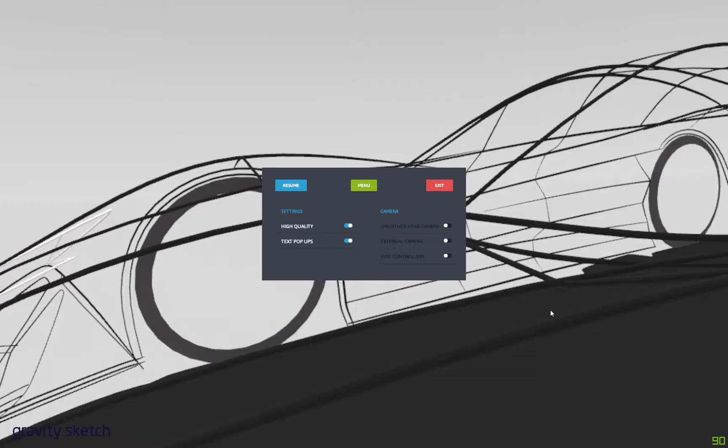Alright, so this is part 4. I'm going to start doing some surfacing on this car.

So one trick I like is if you hit escape while the software is open, this menu box will pop up. If you hit smooth head camera, that makes it a lot better for recording video. So I thought that was a good tip that you guys might like. So I'm going to resume and we will get back into the car.

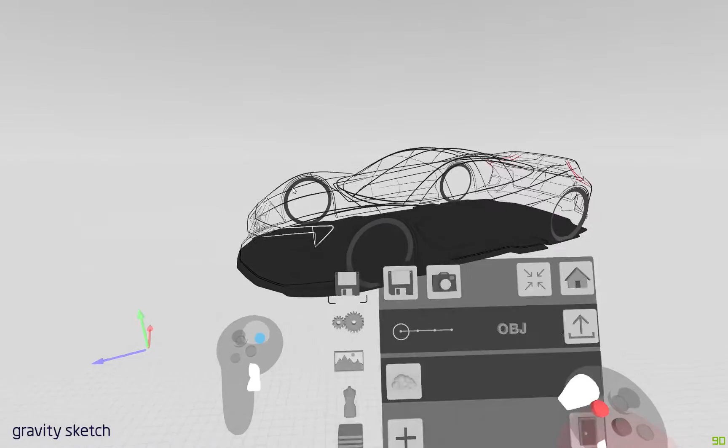I'm just going to go through some of my settings and turn some of this stuff back on. Leave all that where it is. A couple things I did get into doing.

I'm just going to actually hide this layer. I just cleaned up this front grille a little bit. I went more with the BMW kind of kidneys. Not really BMW, well I guess it is, it's a split grille there. So we're just going to keep that.

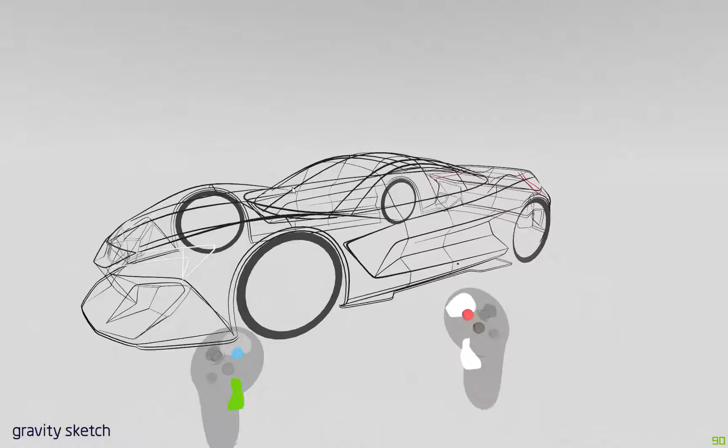I also added these splitter lines there. Those are just plain air sketch lines put right on the bottom of the rocker, and I adjusted the height of this front lower bumper here as well.

And the rear, I think I didn't touch anything in the rear. I just turned these taillight lines. I think that's going to be a taillight red, just to distinguish them for now, as well as that shadow layer there.

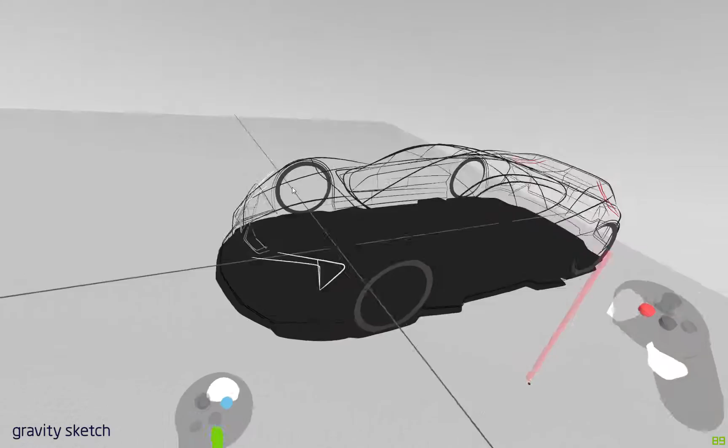I just drew the outline using the filled surface tool, drew that in top view and made the shadow line. That helps establish the ground plane, especially if I upload this to Sketchfab. There's no real ground shadow in that web app, so this shadow plane helps define the car in plan view and helps ground the vehicle as well.

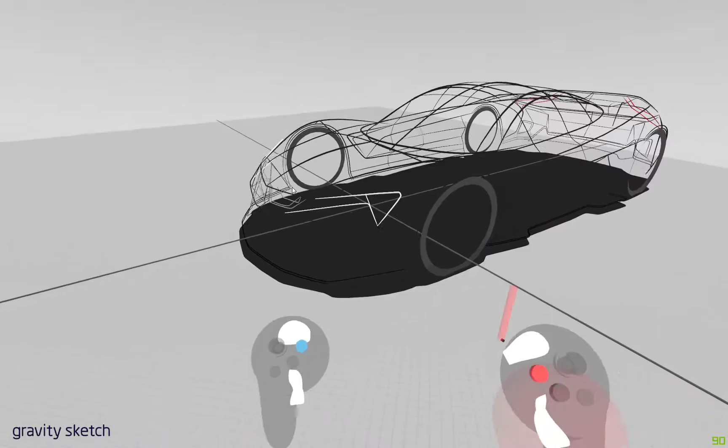So for now, I'm just going to hide that layer and create one called surfaces. You'll notice I actually did delete the layer with the suspension pieces. I don't think I'm going to get them to be visible, so I think that's okay for this right now. I think I'll just stick to surfacing this and showing you guys some of those tools.

So I'm just going to lock some of these layers. Actually, I'll unlock the sketch lines because as I'm building surfaces I start to adjust some of these curves and stuff to make sure they hit. Like this one's probably going to be a little low depending where that surface is.

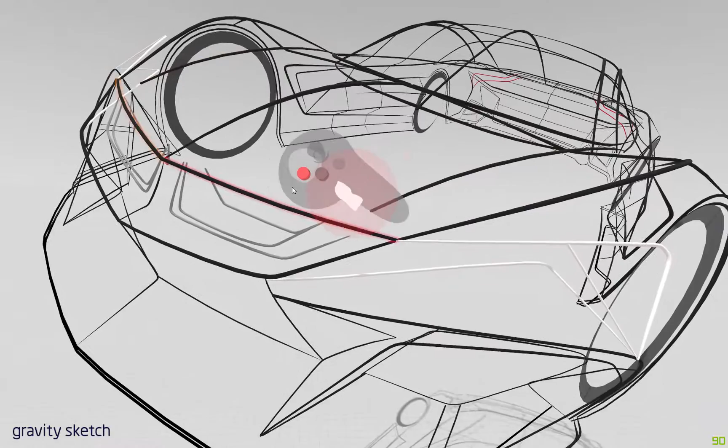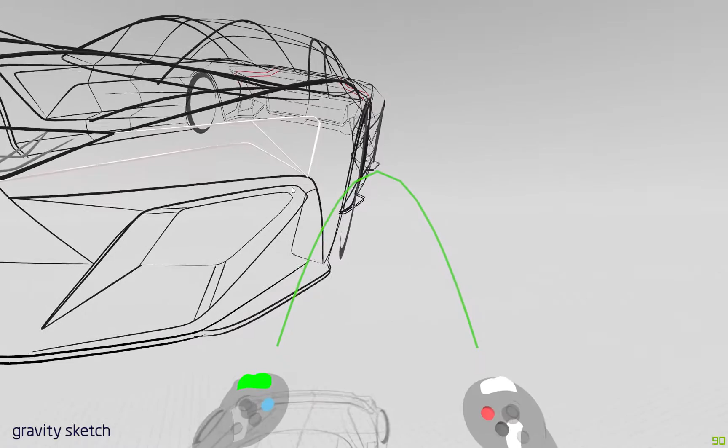So I just go to the curve surface tool and turn precision on, and I use point mode. This kind of surface has initial tension, so if you put it all the way up when you make your surface, let's make this green, you can see it starts out at its highest tension point, or it's the most curvature.

If you lower it down, I try and do it somewhere in there. When it starts out it's a little less, but depending on the angle of your hands, you can make that tension more or less. I typically like to do it somewhere in here because I'm doing relatively flatter surfaces. It might help if you start to go negative for somewhere through here or back there.

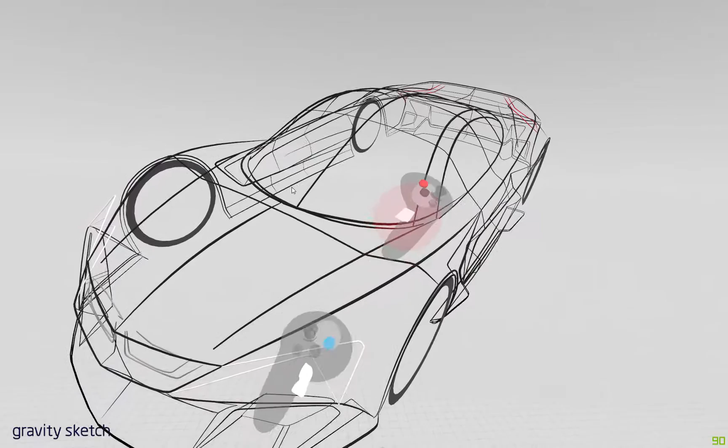Also, one other thing I saw in one of my comments is trying to get the smart move to work. I always thought that your hands needed to be, if you see the two ends of the controllers like that, to get it to work. It's a little finicky, I think there's a distance they need to be. I've always found that my hands are probably about there, but you can see that they're kind of in line with each other.

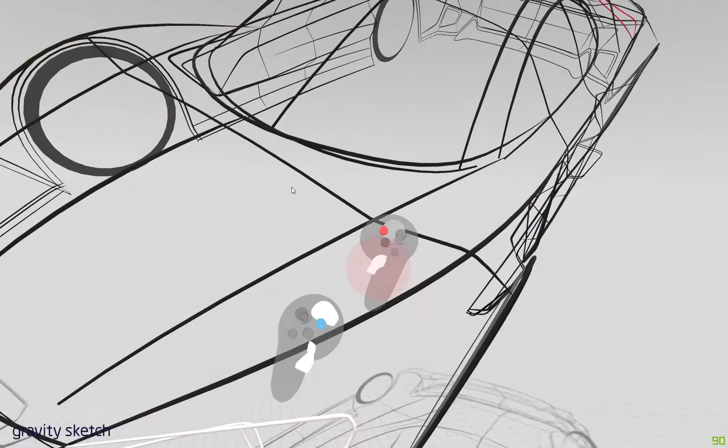They need to be close to an object; they won't do it while you're not near an object. So as I hover over an object, it pops up, and then it'll choose. Then I like to use my right hand there to kind of pick the axis it'll go on, and you can see that pops up. When you do it vertically, hovering over an object, you can start to move it in all those directions. It's nice to flip the view to keep your hands in a more natural position. I thought that was a good tip to show how that works, so just be careful when you're near other objects.

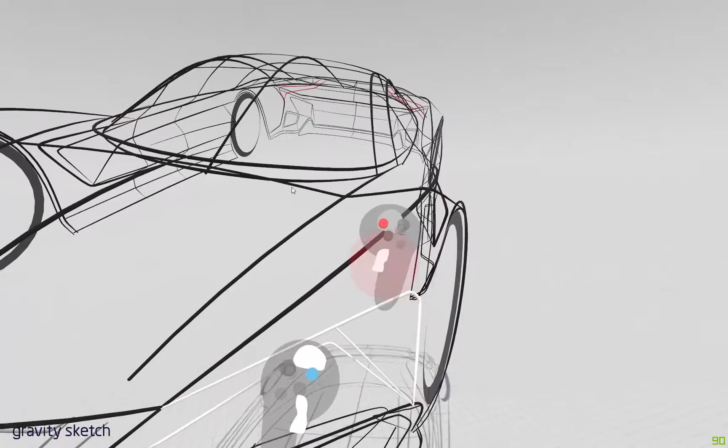You'll see that gray line is kind of an arbitrary angle, that you just want to make sure when you're near other objects, you don't grip and move those things.

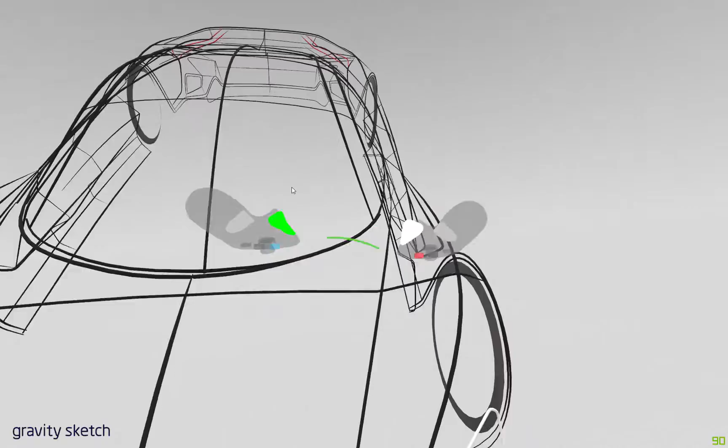All right, so let's get started with some surfaces here. I think I'm going to start on the hood. I'll probably just go and make this patch here and make another one through here, because that goes pretty far back. I'm not sure if I want to add a lot of points, but we'll just get into it and see how this turns out.

All right, and then I just grip the left trigger, pull the trigger, or right trigger to pull the points, and just go down using those curves as guides. And one more there. And then I go back and edit the surface.

You'll see that these points snap. When you have mirror plane on, they snap right to the center there. And then you can see how I notice that that point is a little low. I'm just going to pull it up.

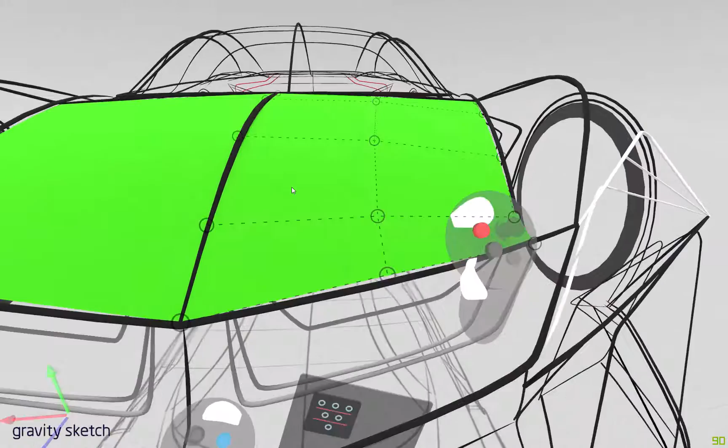Again, with all this stuff, depending how accurate you want to be, you're going to spend more time on this. I think this should be good. I'm just going to follow the trajectory of this curve here, and I'll add another surface on the right there.

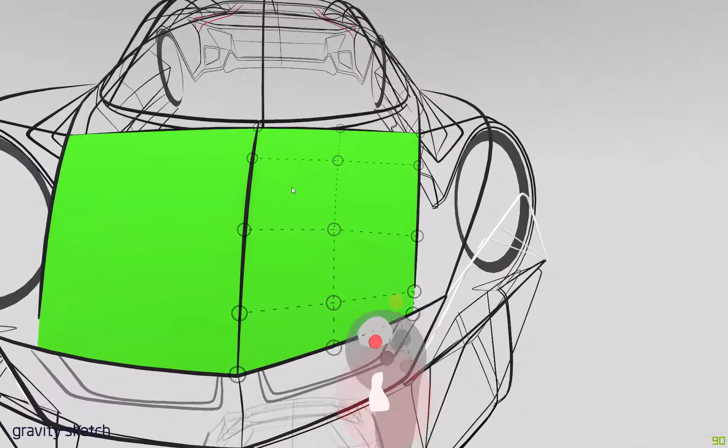And I think I can get away with these bigger patches with less points. As you get into more complex stuff, you're going to want to add more rows so you can push down on the right joystick there.

Kind of like if you're playing a video game, you're pushing down on, like, what is it, R3 or whatever on PlayStation. That'll add it there, and then you pull the trigger to add the point, and then you can move them. But I'm just going to undo that.

And then if you want to add them in this direction across there, you can hover, do a right grip, and trigger, and you can see it added at that point there. So if you needed a little more control over the curvature in that direction...

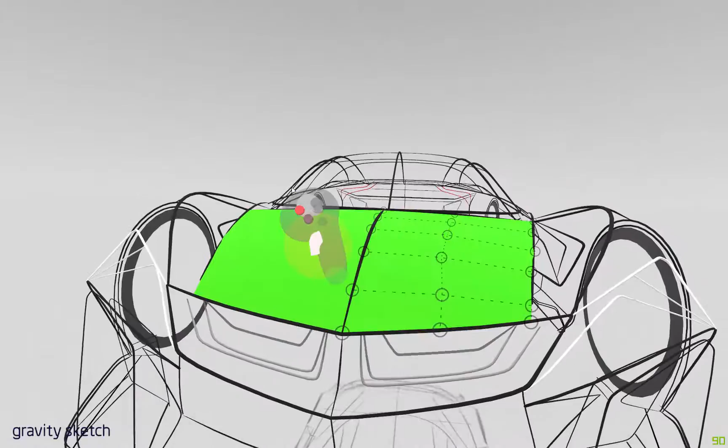You could do that, which I think I might just keep that where it is. And I'm not too worried about the tangency across here. It doesn't look too bad.

This is just to kind of fill in the volume of the surfaces there and give it some kind of color. On this one, I'm just going to come here.

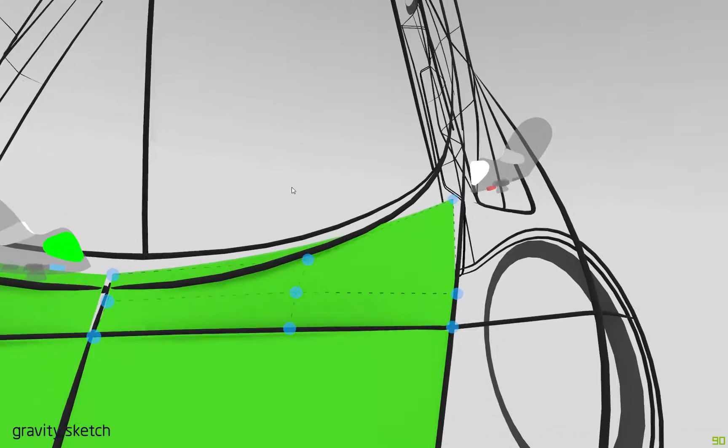And then I'll drag that as far back as I can. You'll notice I accidentally added another row back there, but that's okay.

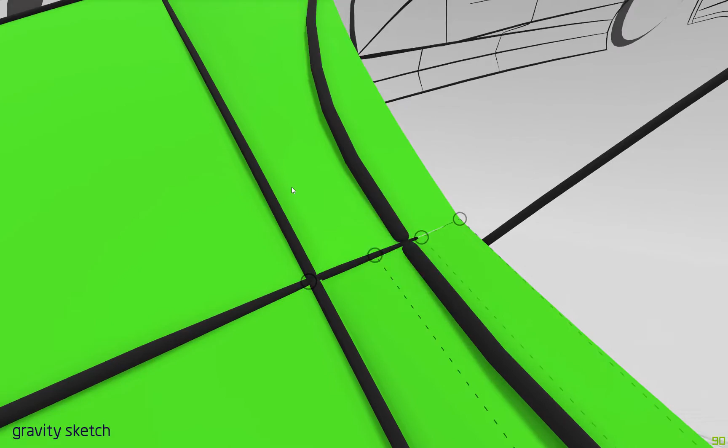So I'm just going to move these to the center, move these forward a little bit more, and then move these up.

If you pay attention to how many kind of rows of CVs you put, you can use that to snap to these ones. I don't typically do that because each patch of surface is going to be different, as you're going to see here in a second.

Oops, I'm going to add one more in here just so I can get a little better curvature around this. So we're just going to start editing these points a little bit more.

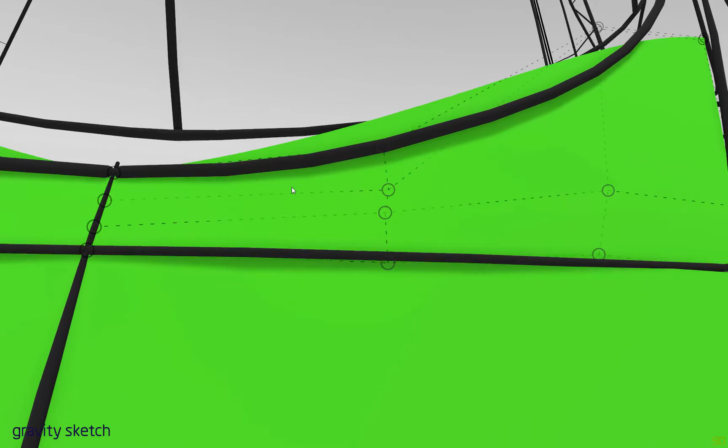And then I try and hide the surfaces, as I explained in my other videos, behind these sketch lines, just to kind of help this out a little.

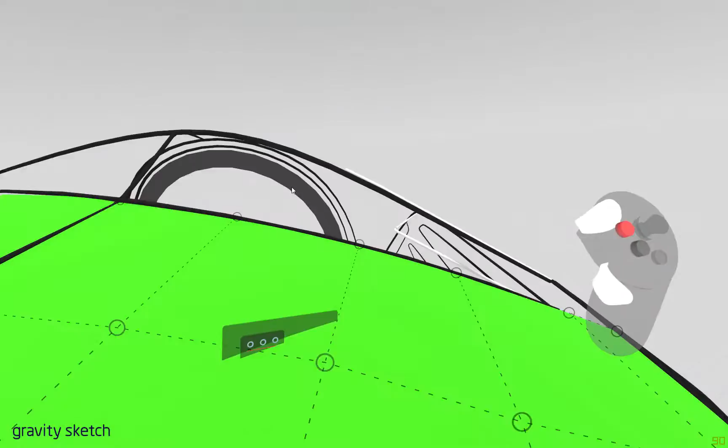Oops. And this is when you start to notice, if you kind of look down across things or from other angles, you'll see them popping through, or I see that this surface is a little shallow. So it's always good to work with things from a different perspective.

There, and I think this one, we're just going to come across like that. That should be good enough.

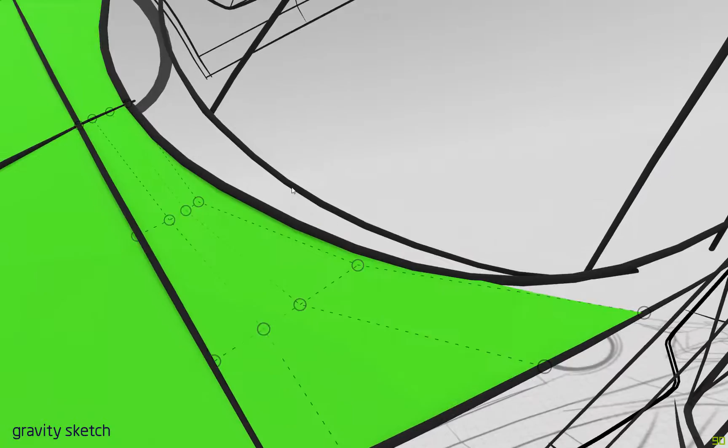Let's see how far I can get that. You'll see as you start to pull it more, the curvature will change, but we could probably get away with something like that there.

And then I'll just do a kind of rougher surface through here to fill in this kind of triangle that comes back here.

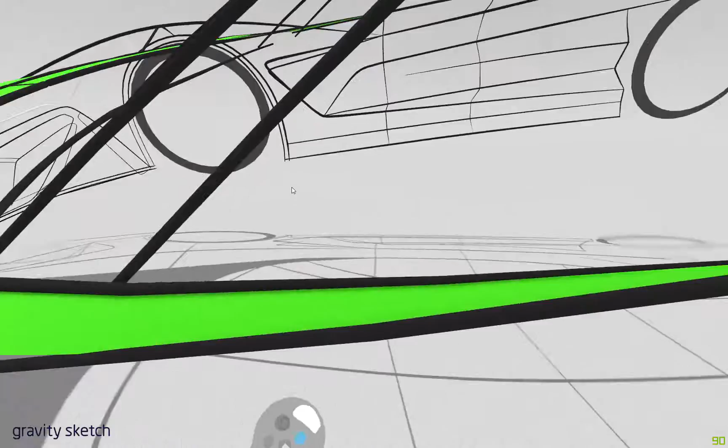And that's it there. Then I'll just move that. Looks pretty good. Excuse me.

And that looks good. Okay, I think that should work for that.

Just going to edit this a little bit more there. So the surfaces go pretty quickly.

You just got to get in the groove of pulling them out and working at a scale that you can manage in kind of one stroke.

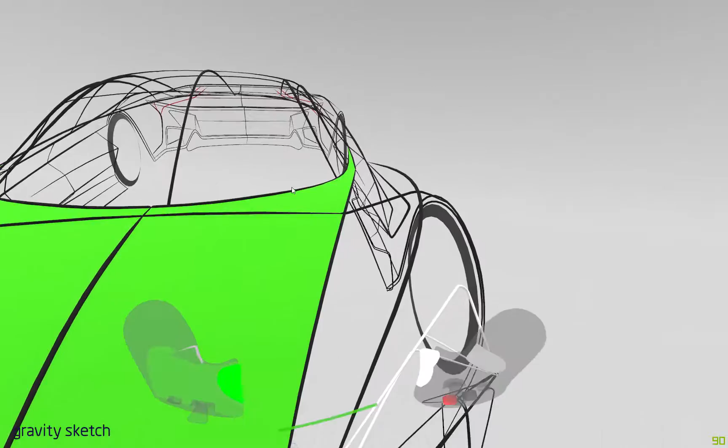I actually tend to sit down while I'm doing a lot of this stuff, so I just work from my chair. So I work pretty small. You can see how close my hands are together.

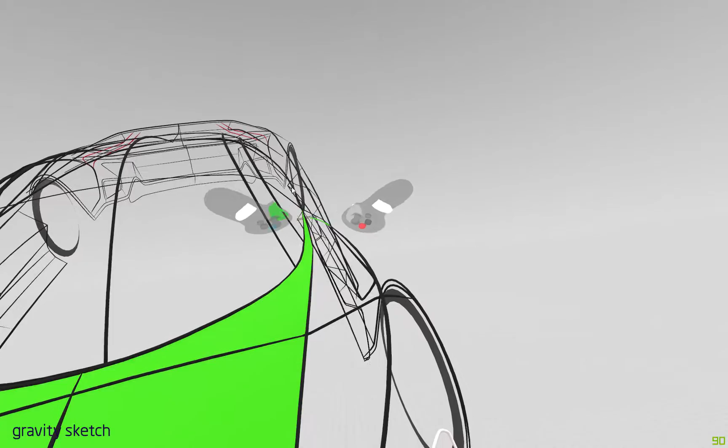They're only maybe 5 or 6 feet apart, and that's my maximum reach there. So maybe a couple feet for each of my arms, and then you can either work toward yourself or away from yourself, depending on where I start.

That's how I work. I'll probably try and work all the way to that point from here. If you don't do it in one stroke, I like to grip with my left hand, and that way I can move the scene away or towards me. Then I just pull out more points to fill in these surface boundaries defined by some of my sketch lines.

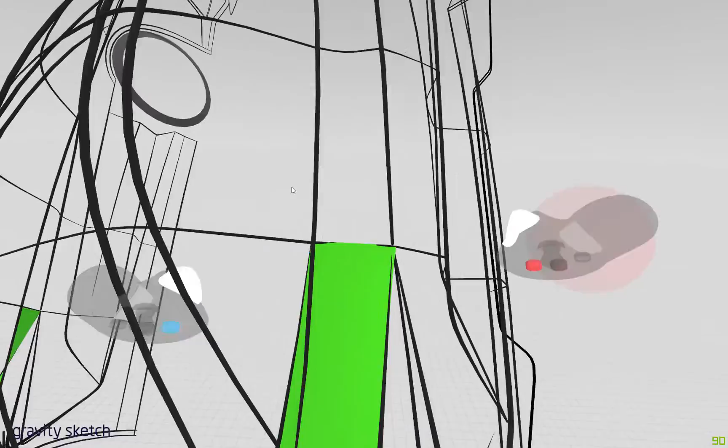I think that'll be a good spot to end that. You can just end it by letting go of the left trigger. If you pull one more time, you'll add another row of CVs, or control points, at the end there. So that's that — this is another way of getting a different view on it. That worked pretty well.

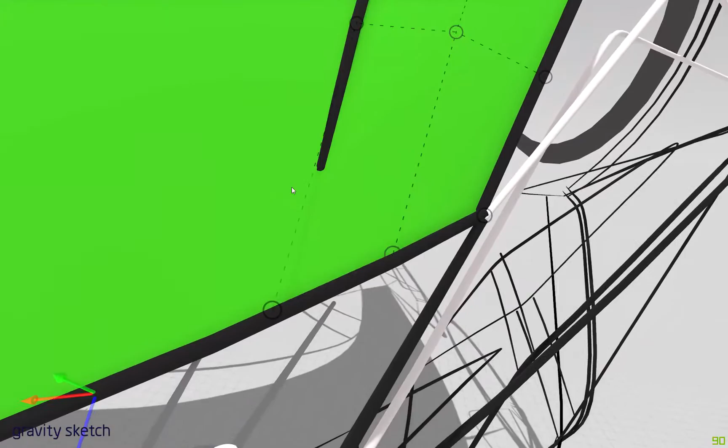Let's move these points. I kind of want that to fade out there, so I'm going to indicate that with that sketch line. And surfacing later, I can fill that in. You can see up here, this didn't quite get there. So it looks pretty good.

We'll change up this end a little, and we'll put that there, and that, like that. Cool, so that's that.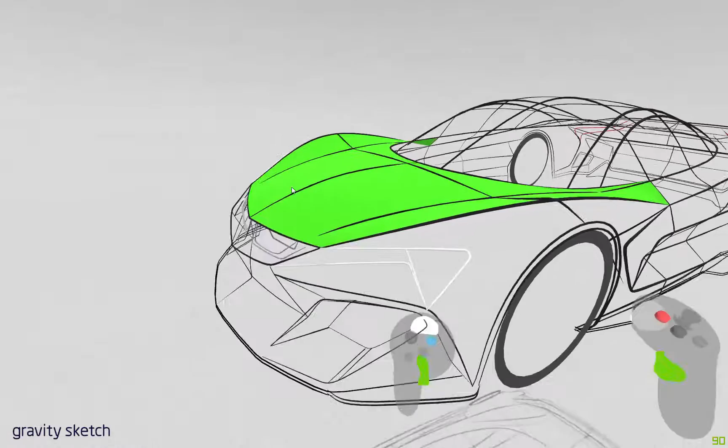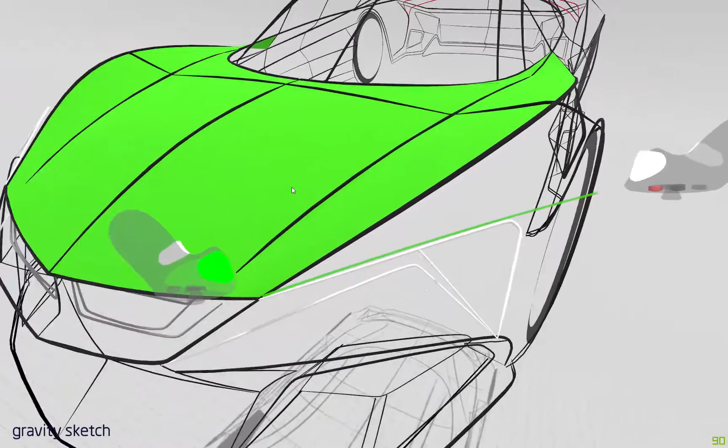I think I'm going to do one big surface coming around like that. I'll probably end it here, maybe across there, and then I'll do one down like that. So let's start like this — that's also good to kind of define the big surface there. So, like that.

Trying to keep my hands with a little bit of curvature on it because I want this to be a fairly positive surface. As you get here, the surface is going to start to splay out, so you just have to pay attention to both points where your hand is. I just want to come right across this point here so I can make a triangular surface in this area, and then start to come down like that.

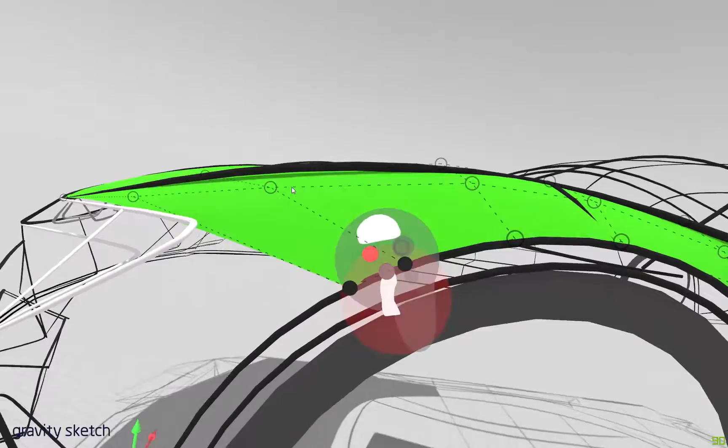And these I'm just going to pull up and hide the edges. I'll probably add in a row right here just to help me get a little more in line with this headlight here.

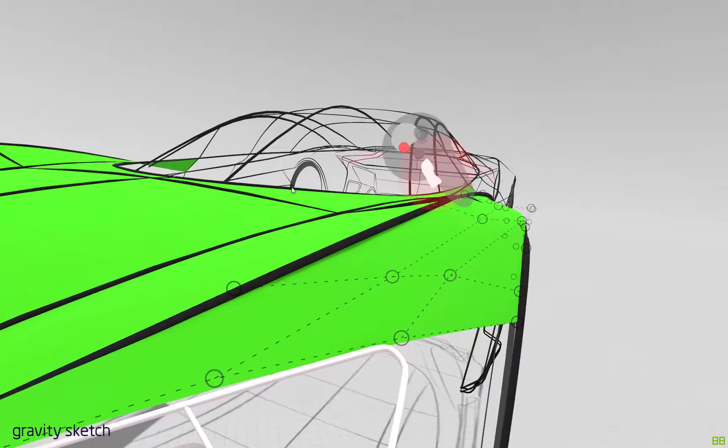So that's not bad. You can also tell by the shadow that these curve lines project onto the surface whether it's below it or not. So this one's a little bit like that, and you can always go and tune up those lines around its boundaries there.

Maybe that needs to come a smidge more down, and just try and keep things even. But you can see when I added that, it shot those points off, so you'll just have to go in and kind of manipulate those a bit.

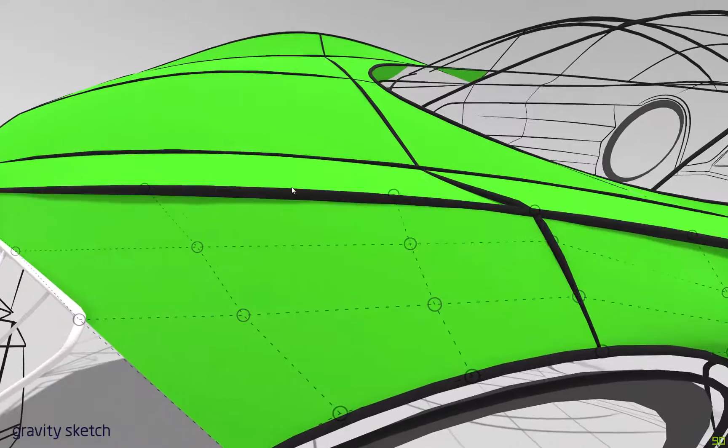It's NURBS geometry, but I do a lot of subdivision polygon modeling, so I have that habit of keeping loops in a row and lining up CVs to minimize bumps and stuff. It's a good practice — that'll help you later on, just to keep these kind of clean.

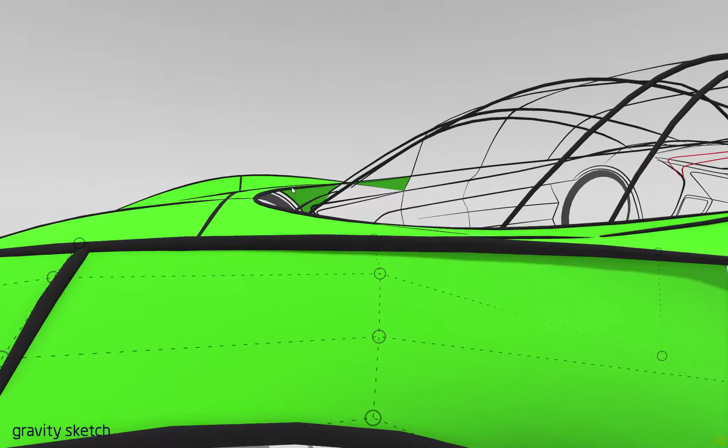I'm not sure where the surfacing tools are going to go, but I personally would like to see some subdivision modeling, because that seems best for me — you can push and pull, and build topology that comes off of here and branches off over there, so you can make everything one continuous surface and get nicer blends.

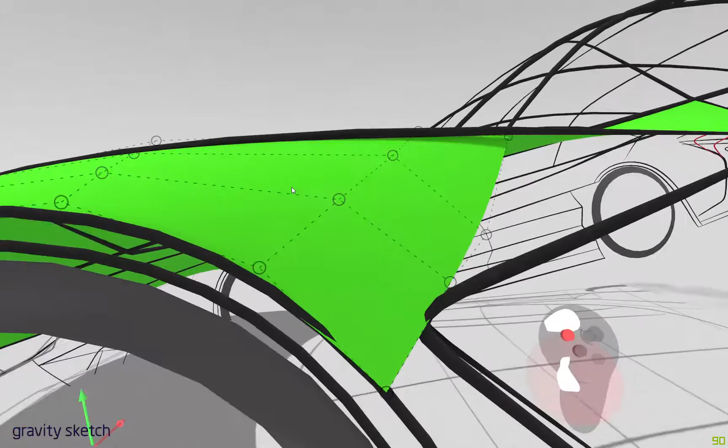I don't really see myself creating surfaces and projecting curves on, and trimming and blending surfaces. I don't think this is a technical tool set right now — it's more of a concept development, early design phase tool, which is perfectly fine.

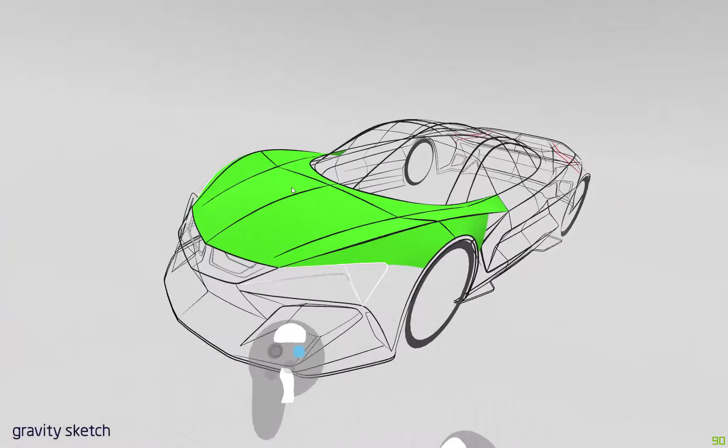It's fairly quick, so I'm more into figuring things out earlier on. I spend more time making all of this, just the sketch curves — I think I spent about an hour and 40 minutes, and the surfaces maybe another hour. So within 3 hours you should be able to get a pretty good car made with a lot of detail figured out, or you can do something super rough and quick.

I've tried to do things in like half an hour, but my personality tends to slow me down when I try and think too much on things.

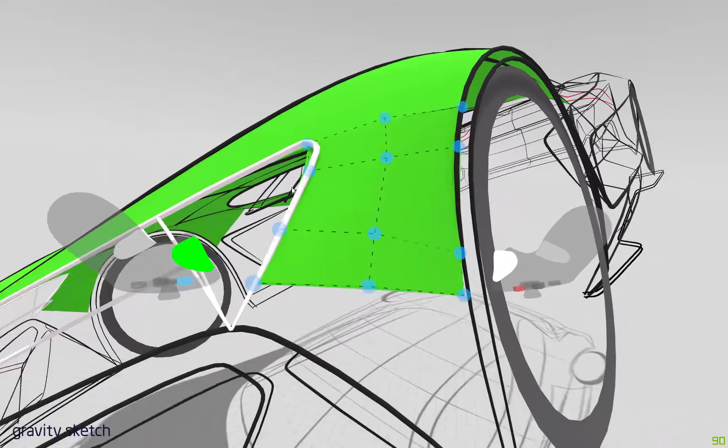Everybody's going to work differently. Everyone will have their own techniques, and they all work. As long as you get the design done and you're able to figure out what you want to make using the tool, work however you want.

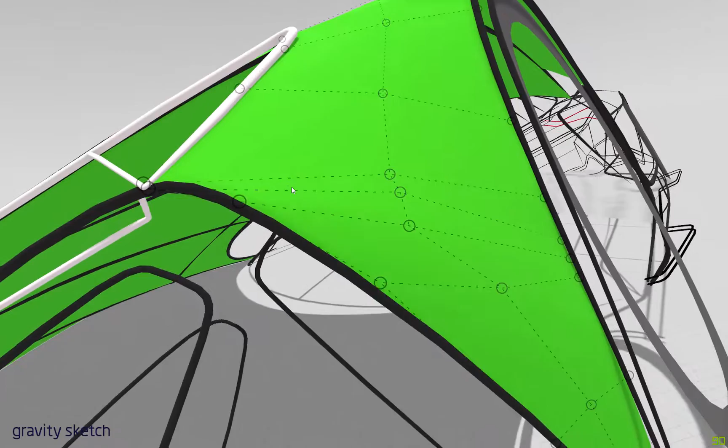Just making some more surfaces. I like to put these two points close together to fill in a corner like that. But I'm gonna add another row through here, just so I can get a little more curve on there. Just added that point so I can hide this a little better. Then I'm just going to spread these out to help keep this surface from getting a pinch. When things get close together, you can start to get dips and stuff like that. So that's just good housekeeping while aligning some of these points, getting them evenly spaced, especially at their boundaries.

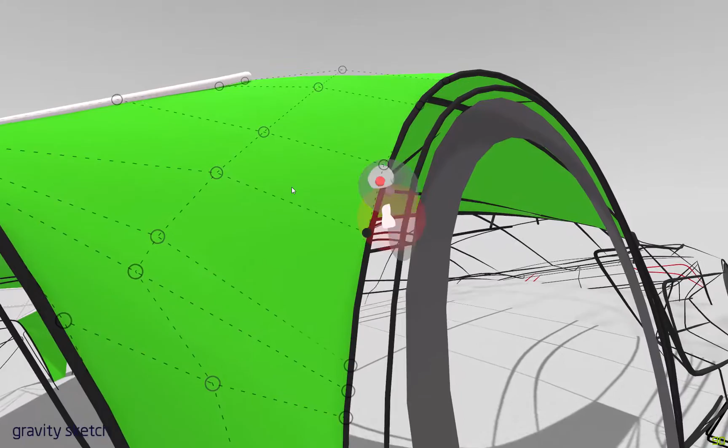You're trying to connect all these different lines with different curvature. Some of them are big sweeping circular forms, like around the wheel arch, and some are kind of sharp, tight lines. So it's a bit tricky. That's why I think the subdivision stuff could be useful in a scenario like that, because I can branch off little bits to fill that in.

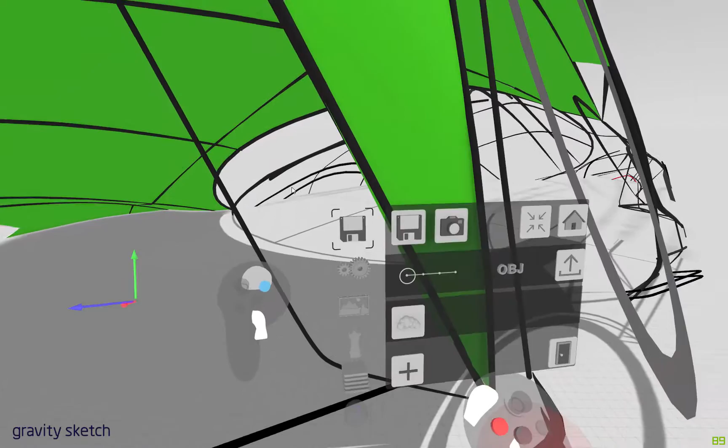You could probably do it without the precise mode, but I like to export NURBS geometry from here, so that's why I don't. I haven't actually played around with the tool too much, and I'm not sure what mode it is. When you come in here and turn that, I guess it's just non-precision, so you're turning precision on. You might be able to make some other types of surfaces like that.

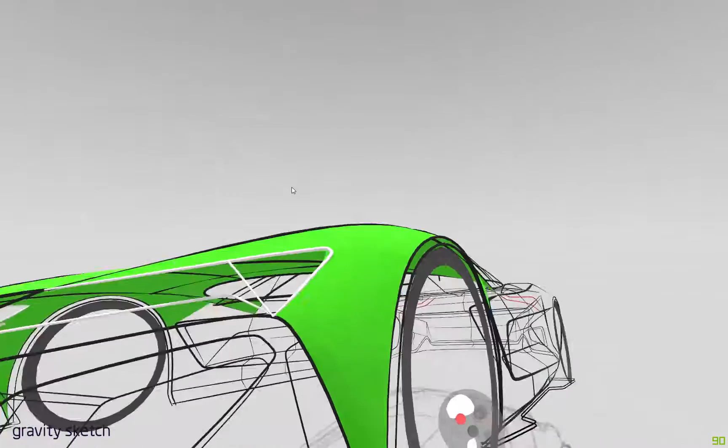Okay, we're just gonna pull that down. That looks pretty good, I think. Trying to match this curvature here. And then again, like I did over here, just trying to hide that around there. They're not perfectly touching, but I think that's good. It gives the volume. It's letting me see that I can get a pretty smooth surface through here. Might just need to work a little harder. That's not too bad. Pretty good.

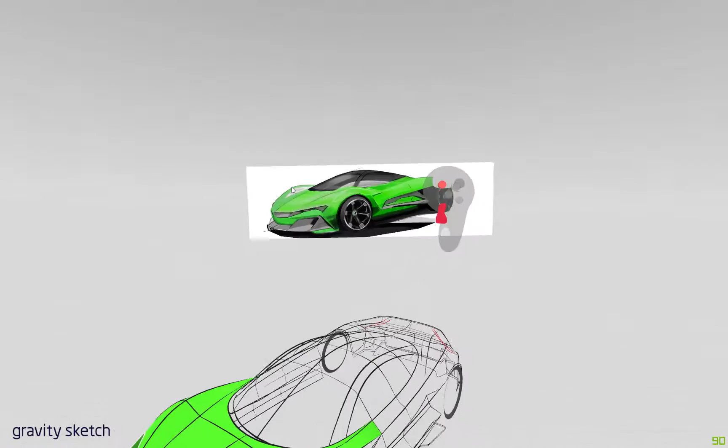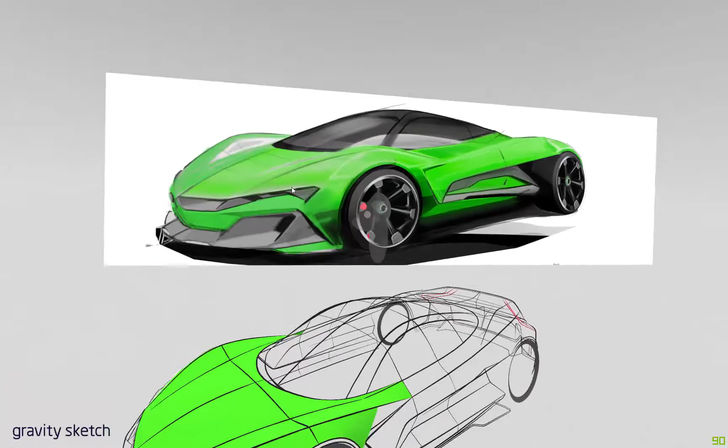One thing I should do is pull my image back in. I'm not sure where it went, just for my color reference. Looks like I lost audio here for a second. I think I was just describing how it's good to have reference images to use, especially when trying to break up your model.

So that's green. I think this is all green down here. So we'll do that.

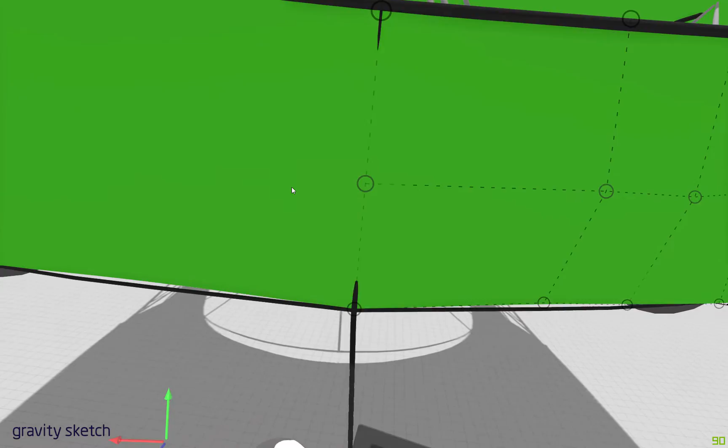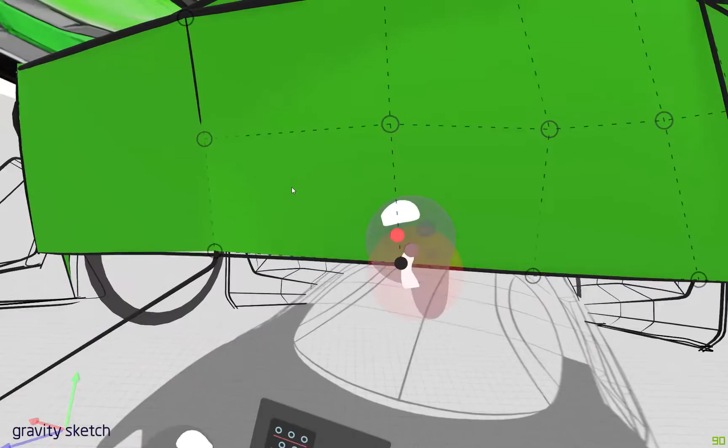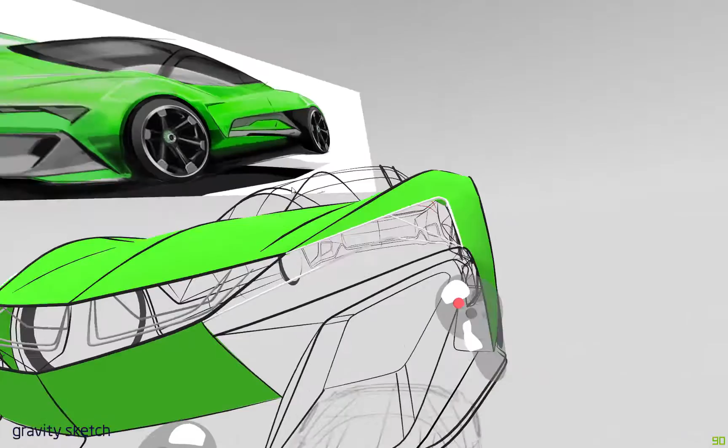I think this tool is great, and it's nice to be involved with it so early on. I think it's got a lot of potential for helping designers or helping make things in 3D while you're ideating, while you're thinking about it. It helps you understand the three dimensionality of your design as you're coming up with it. A lot of this stuff needed to be figured out just from that one sketch, and you can quickly block in curves and figure out some of the volumes that need to be made. Here's going to be a little triangular surface in here.

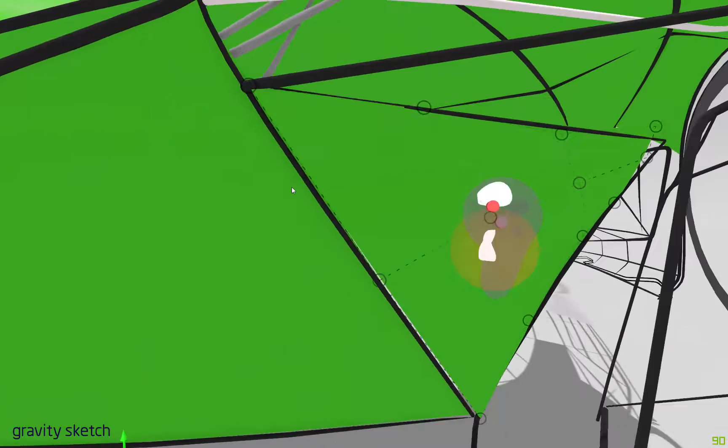Losing tracking. We're good. And you want to be careful when you're clicking. I always tend to move it slightly, but when you get back into editing, it should pop it back to the position it was in. Just be careful.

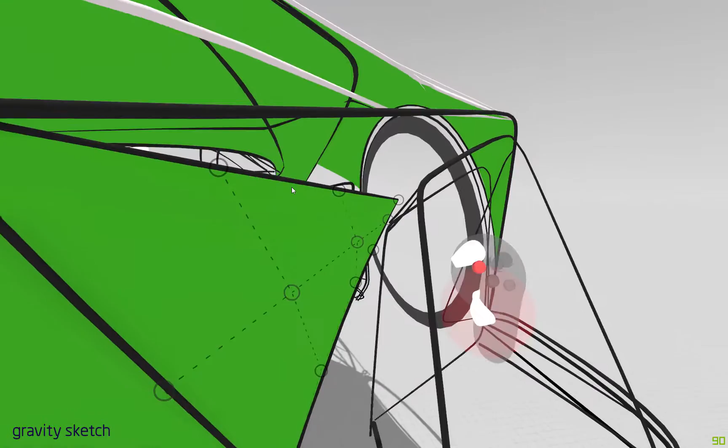I think the biggest problem with creating things in VR now is that your muscle memory is not there to work in 3D space. Maybe clay sculptors or clay modelers might have a better knack for it because they always have their hands in space. But here you're not resting them on anything, so you're just free floating, trying to stabilize your arms while you're doing some of this stuff.

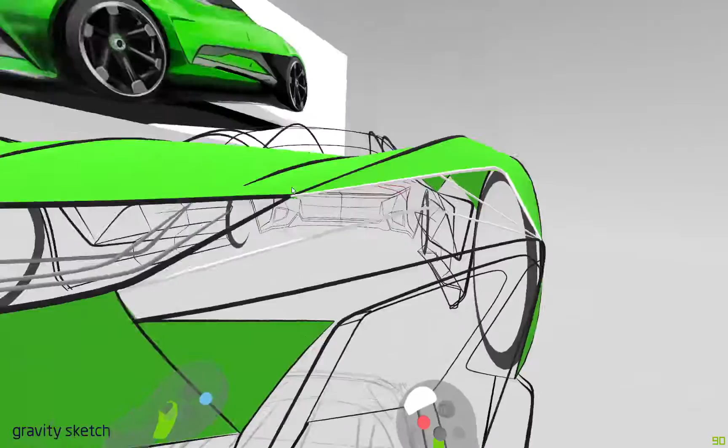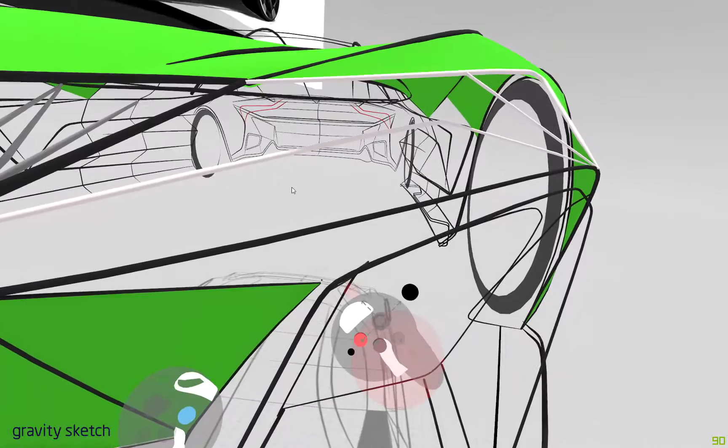So I think there's actually going to be a pocket back here. So I'm just going to draw one curve here. I want to make sure my pressure's on. I think there's going to be something that comes around and connects to that there. Actually, it's going to connect to this back here. So I'm noticing this is a little negative.

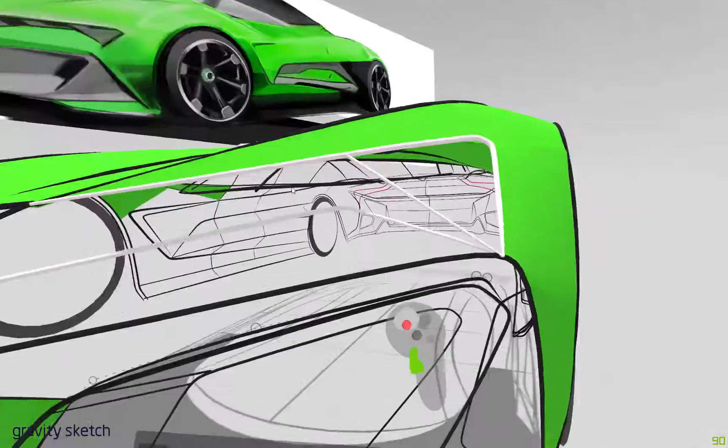And we'll just bring that down there like that. So I think there's going to be a surface back there. That might be, yeah, that should be part of this gray piece.

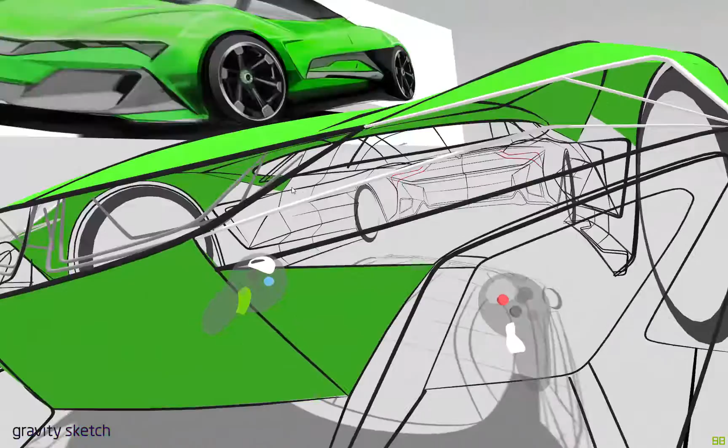So it's nice to define your boundaries as you're building things. We'll put this surface to fill in there. I should be able to do that in one go. It's pretty square - that's one thing too, it's nice to establish square or four-sided surface patches. That'll help you here so you don't run into pointed areas or odd blends.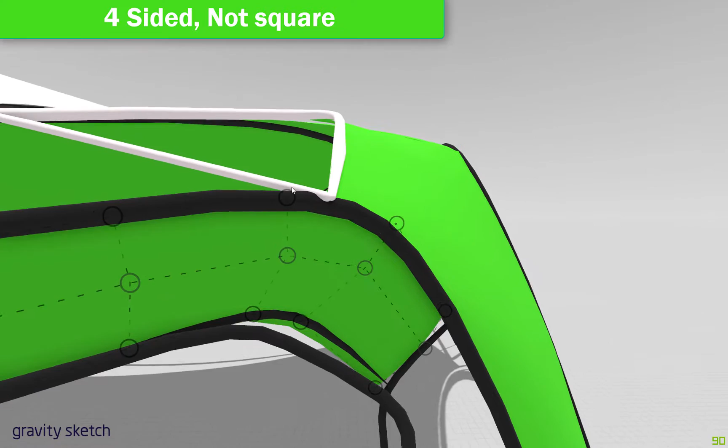That's a good practice with any modeling, polygon modeling, or traditional NURBS modeling in CATIA or Alias. Obviously with NURBS modeling you have trimming and stuff, so sometimes you're going to have odd looking patches, but it just helps to keep them square.

There we go. Some more points. I think that should do it.

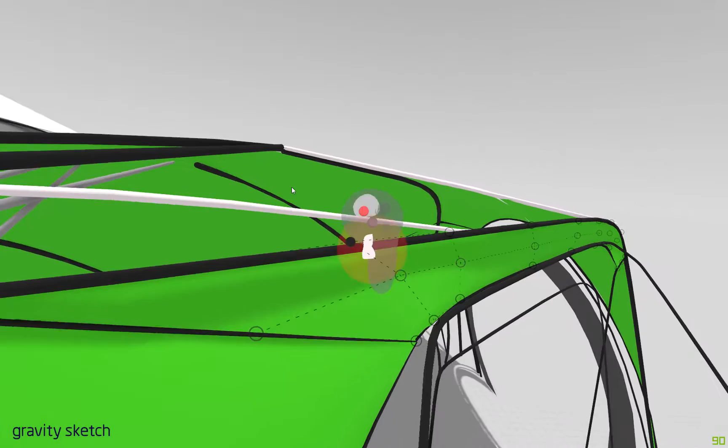Great, that looks good. I think I'm going to switch over to gray. Actually, we'll do this one in here.

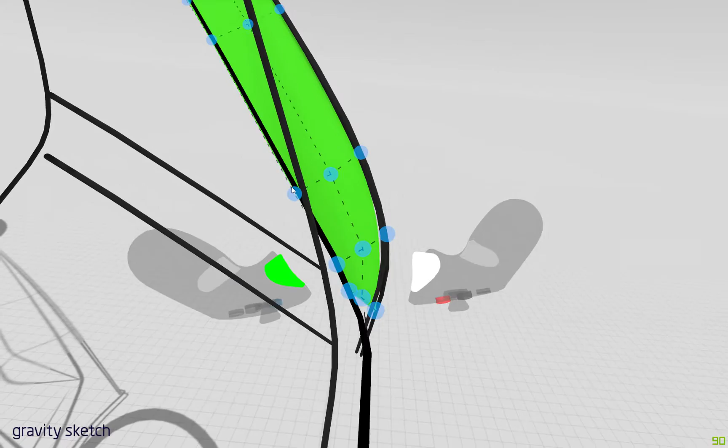I think this area is still a bit muddy, meaning not figured out and hard to understand. So I'm just going to block this surface in and then turn this down there. Maybe I'll do one more and end it like that. Oops, got a little flick up there.

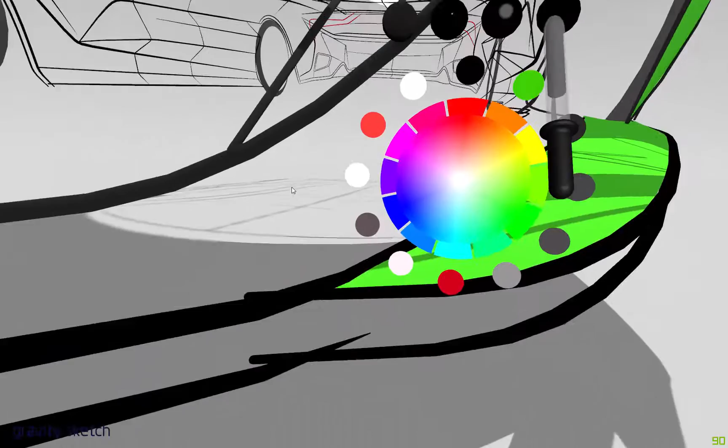Actually, it looks like these are not black - they might be. There we go. These different balls up here are different reflectivities. I think that's a cartoon shader, and that one's completely black. You can just see that surface change there. So I think I had all those set to that color.

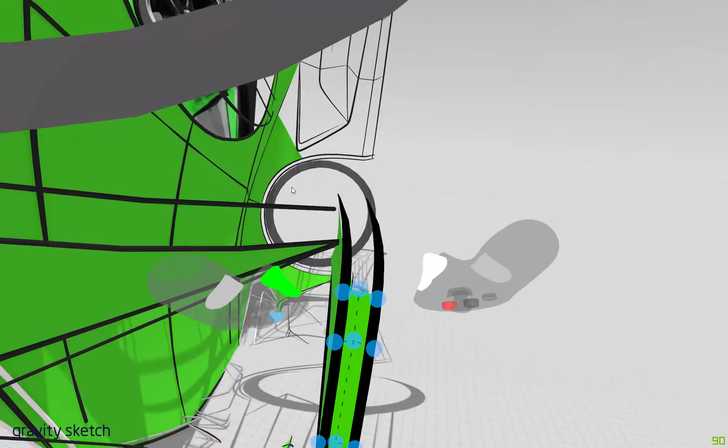And then I will make this green right here. It's nice that it saves your latest color picks around the circle, so you can always just go back to them. So we'll go to this green here, make this kind of splitter shape. I'm thinking I might actually make this green because I added that one down the body side there under the rocker - that's probably going to be gray.

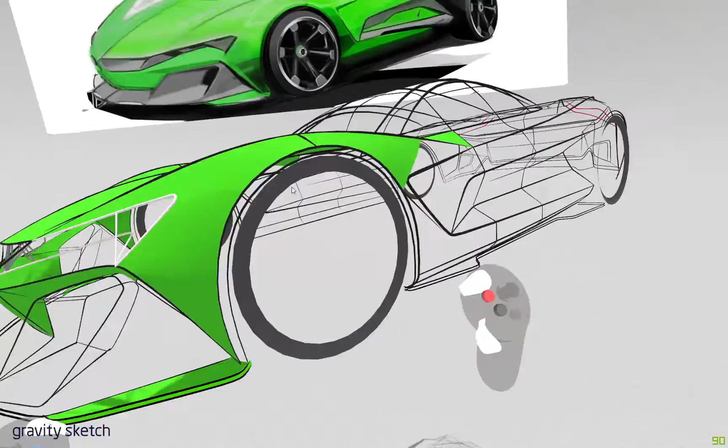This one here, because I think the whole rest of the body is going to be green, so that might not look good graphically. So let's actually come up with a gray. We'll just choose that one.

So if you find your colors are kind of behind something, if you keep pulling forward, it'll move the whole thing in space, or the whole color wheel towards you or further away, and then you'll just have to pick your color from there. So we'll just choose that one.

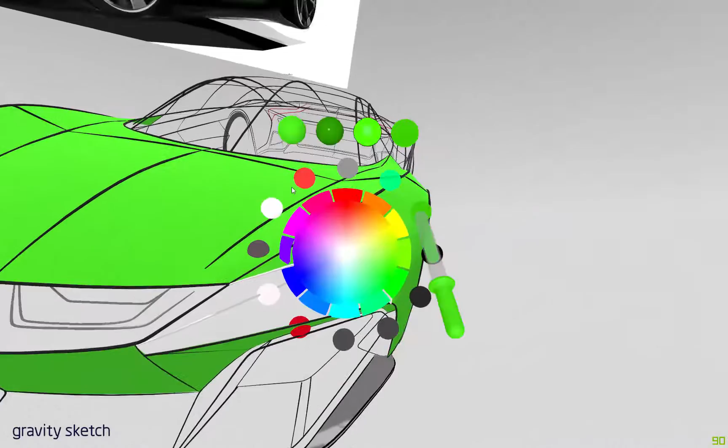These actually look a little low. Not bad - I think we'll do a light gray like that, and that'll be on this rocker there. Now I can start doing it here. Oh, I forgot that one green surface here, so it's going to twist a little as it comes to that, but that should be okay.

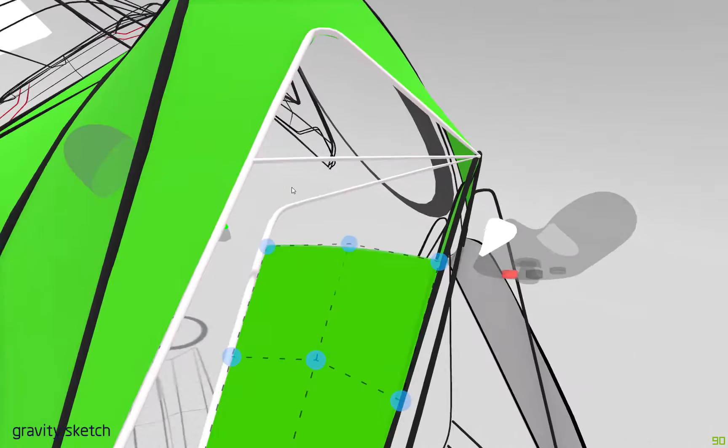I'll do the headlight graphics later - I don't really have an idea of what I want to do with that. But that's okay, because I could just indicate the lens. I think I'll do one there, one there. I like to put two closer together just so I can get a little bit of a round there.

Hide these edges, like that.

Not bad. I notice as I'm editing my videos, I say 'not bad' a lot, so I apologize if that's annoying. But now I know about it, so I'll try harder to not say it.

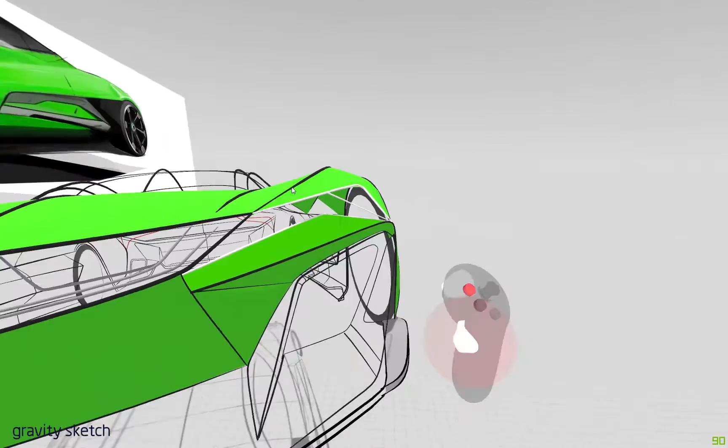Cool, so that's that. I think I'll do this whole area as one, and then I can do all these as kind of individual. Actually, this as another one, this kind of loop, and then yeah, I should be able to get most of that all in square surfaces.

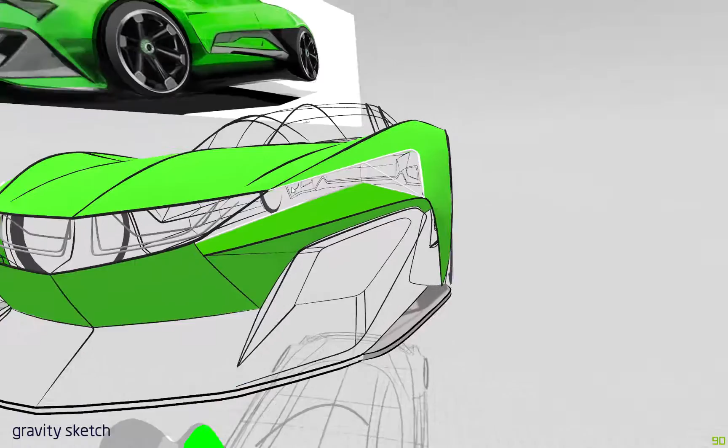So this, I'll just pull it just a slight bit underneath this one, so I have some flexibility to move that around. Looks like this curve needs to come up just a little. This probably would have a little radius in there.

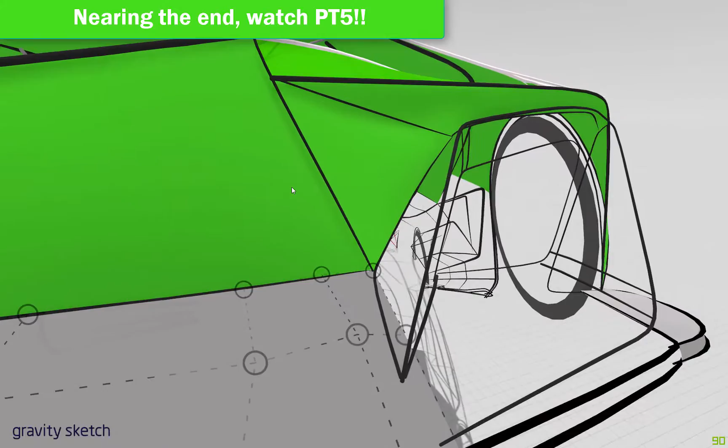It looks like a hard color break - maybe there's a part line, but I think it's a sketch line, so it's okay. And that works.